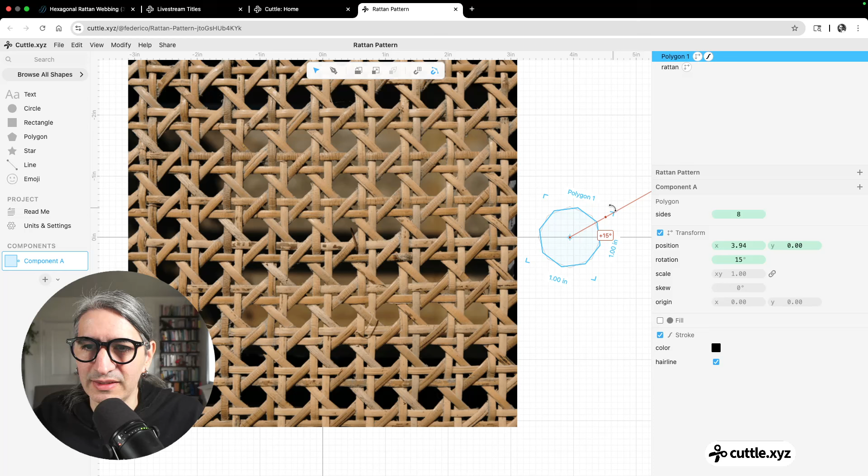And then I started placing my octagon here in the middle. But then I realized that the octagon was the shape of the inside hole, but that shape was actually better understood as the combination of two squares. Let me tell you what I mean. If I grab a square and size it a bit, I could see that there are lines going across - that's one of the squares, horizontally. Then there are lines going vertically, so that's another one of the squares. And then there are lines going diagonally.

They are going at a 45-degree angle. So for example, if I take this same square and rotate it by 45 degrees, that also matches the lines. Oops, let me move that. Maybe I should lock that image so it doesn't mess with me. That wasn't the image. Anyway, so I could make the hairline. Yeah, so there we go.

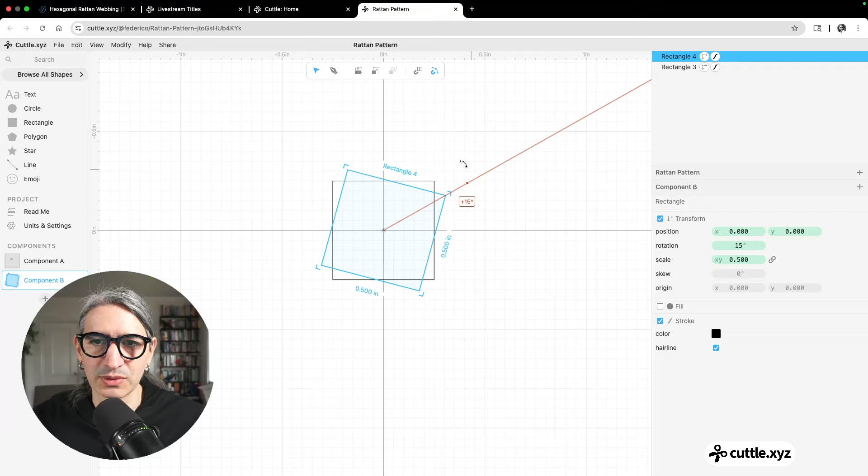So then I was thinking, oh okay, this might be the basis for this pattern - it's just two squares, one of them rotated 45 degrees. So let's test that out. I'm going to create a new component here. I think my end result should be a little smaller than 1 inch, because 1 inch seems really big, so I wanted to start with a square that was half an inch - sounded reasonable to me. So I did a square that's half an inch. Then I can duplicate it, and then I can rotate it 45 degrees. If I hold the shift key, you'll see that it snaps to 15, 30, and then horizontal or 45.

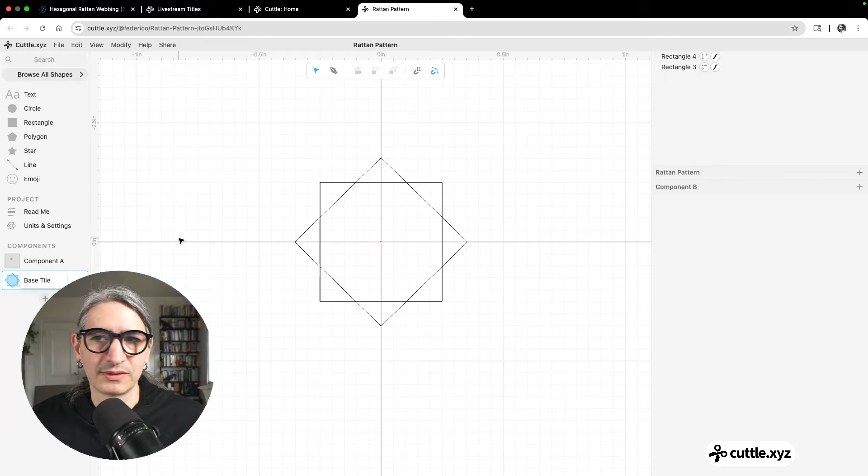So now that I have this base thing, I could use the tile repeat to test it. I'm going to call these... what do we call these? I don't know, the base tile. So in a different component, I'm going to place my base tile, and then I can use that tile repeat. I'm going to go to modify, there's this tile repeat. Now I just need to connect it.

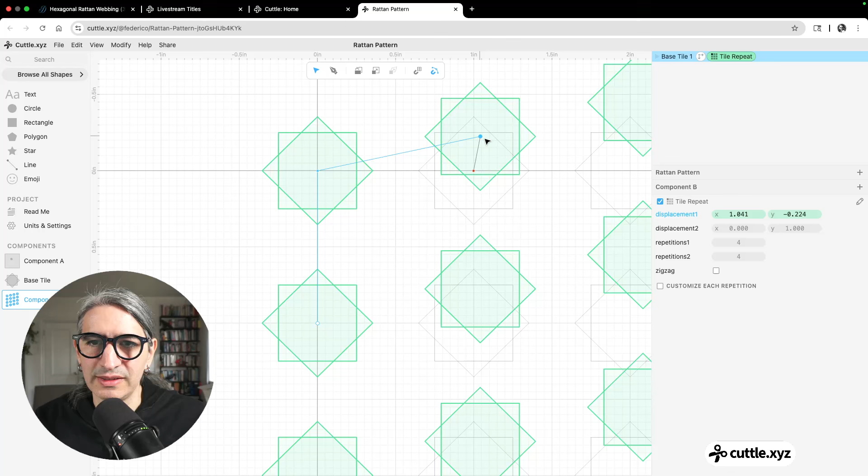When you're using tile repeat, whenever you select the base shape, you'll get these handles, like a blue handle with a displacement. I could change the displacement here and the other displacement. But sometimes you want to match certain points, and as a default, the origin is right at the center of your shape.

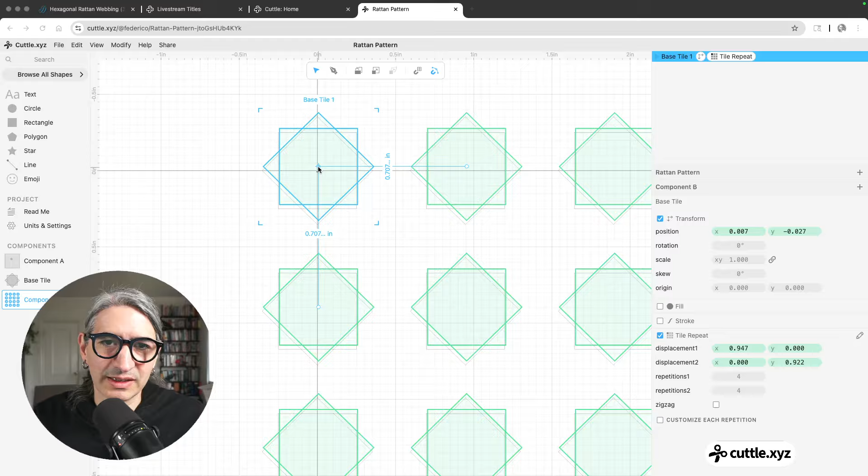If you hold Command, or Control on Windows, twice you get Siri. Let me undo that. If you hold Command, then you can move the transform center.

I want the corners of the rectangles to match, so I can place it first on the top corner, and now I can grab the displacement handle and make it touch. This isn't going to work for the other side, so I can move the origin again, and make this displacement handle snap to the corner.

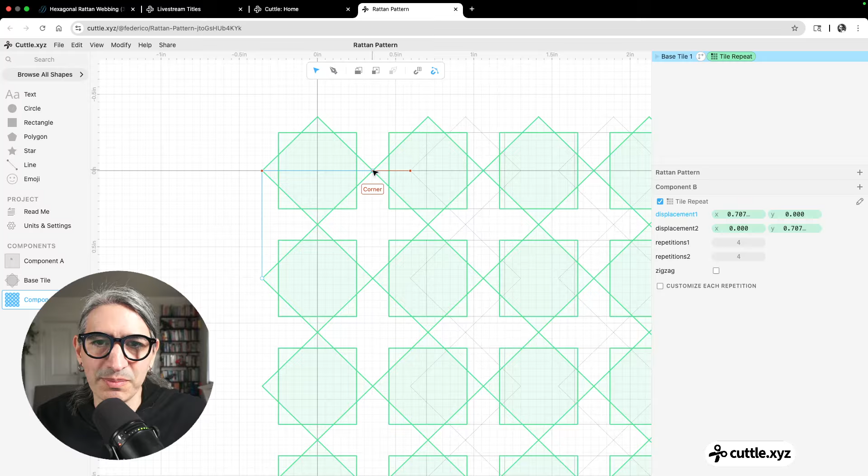Check this out. I think I have part of the pattern here because I get the 45-degree lines going in both directions, and I almost get the horizontal lines. So close, but not quite.

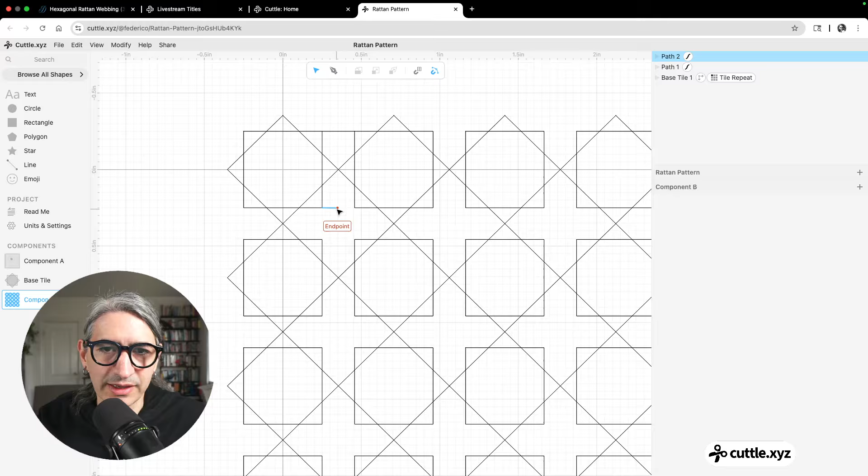I think what I need to do is connect this line to this one. So I need to extend this one halfway, and the other one is going to match it.

What I'm analyzing here is that if I drag a guide, I need this line to extend all the way to the midpoint, and that needs to happen all around.

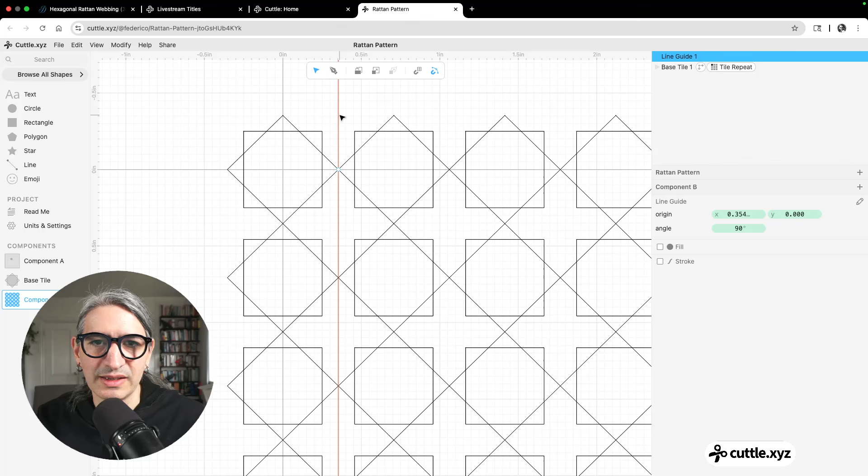So I can make those lines continuous. Let me go back to my base tile, and I'm going to drag a bunch of guides to make that happen. To get guides, you click on the ruler on the top, and then you click and drag.

Here we go. I'm going to use the pen tool. The idea here, oh, maybe I didn't put it where I wanted. The idea is I want to make a line from here to the edge, and then from here to the edge, holding the shift key so that they stay horizontal. Then I need to do that all around.

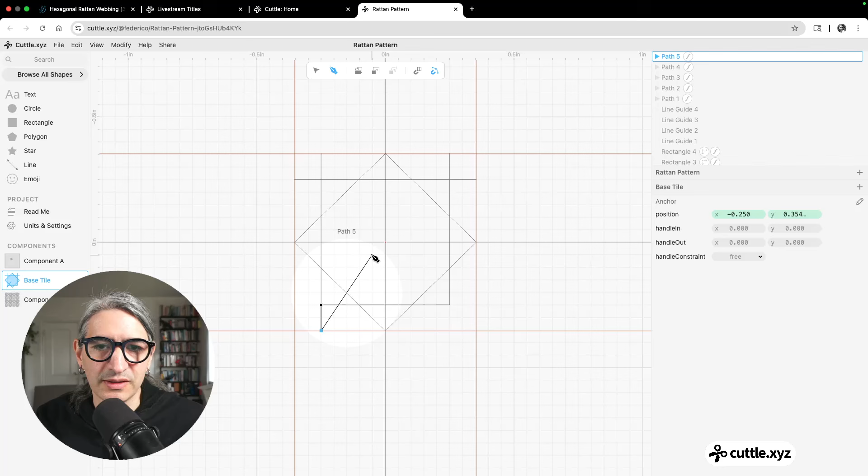But this made me think that there are essentially lines going across. I guess this would work - hold the shift key, then pen tool, holding the shift key, and then every time I'm making a new line, I hit select again, and then I start it.

As you can see, the shortcut for select is V. So whenever I hit pen, I make my line, and then hit V, so it kind of snaps out of it.

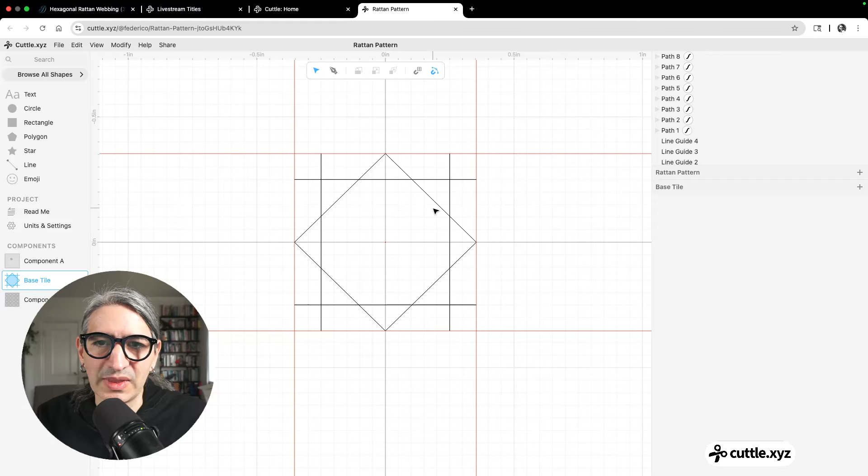I think this gives me that connection point. So now if I move over to my pattern, I think this works. I got the horizontal lines, the vertical lines, and then the 45-degree lines.

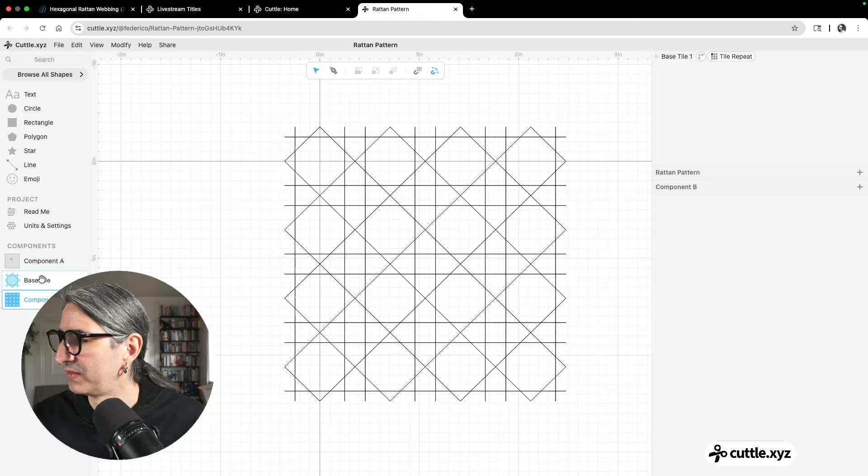Now, how do we go from these to a laser cut thing? I think outline stroke is going to do it for us. Basically, I'm going to go to the base tile, select everything, and there's a modifier called outline stroke.

That essentially gives it some thickness. But if I do the default width, I see that these intermediate holes disappear. So what I want to do is make my outline thick enough that I can still see those holes. Let me move over to my pattern.

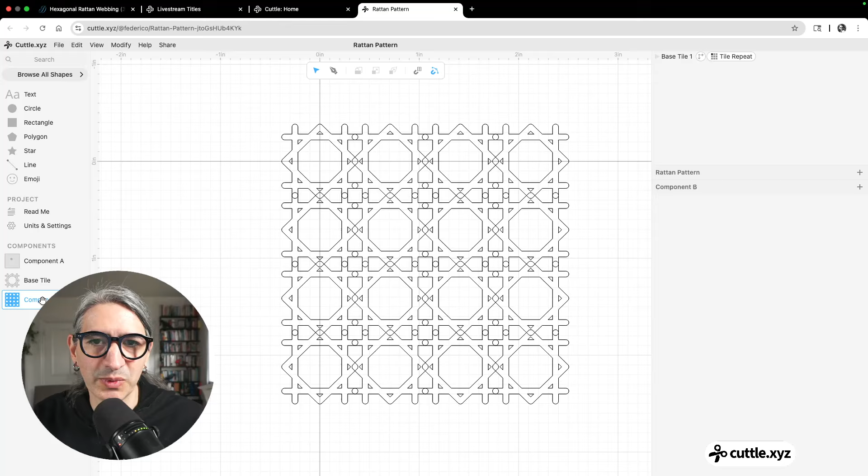My base tile looks like this. And then when I have everything, I get these overlaps, but I can deal with that by selecting and then applying a Boolean union.

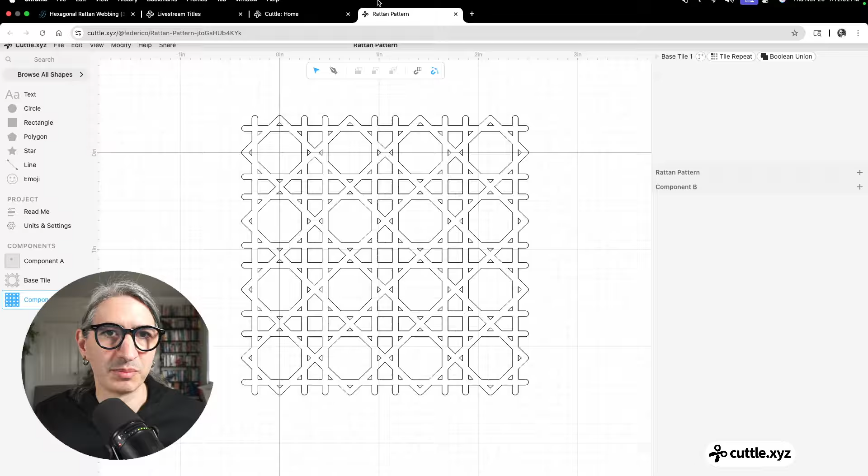So that works. I think that gives me the base pattern. Let me see if we can compare - here I get horizontal lines, vertical lines, and then a square in between.

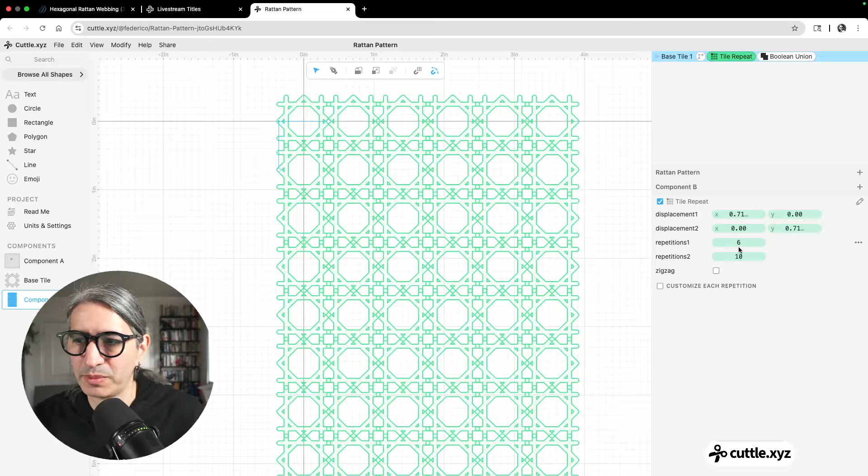Let's cut it, because this is good to go. I can make it as big as I want if I increase the number of repetitions, but I think I did a 4x4. So then you can go to File, download SVG, and then cut it. Check this out.

My masking game wasn't super great, so you can see some scorching, but I think it sells the idea. It cut all together, I think it gives me the pattern that I wanted. It takes a while to cut - actually, it's a surprising amount of holes. I've noticed that.

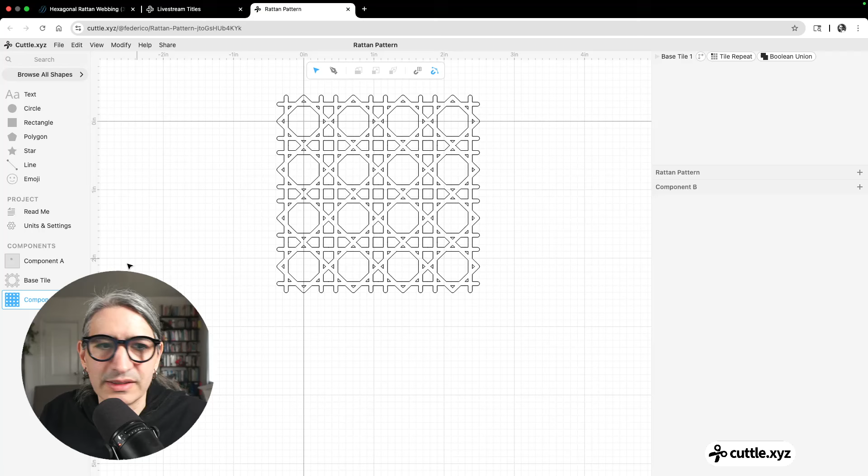I did notice that on some of the ones I saw on Etsy. I'm gonna extract the width parameters, so let me extract this project so we can visualize it better.

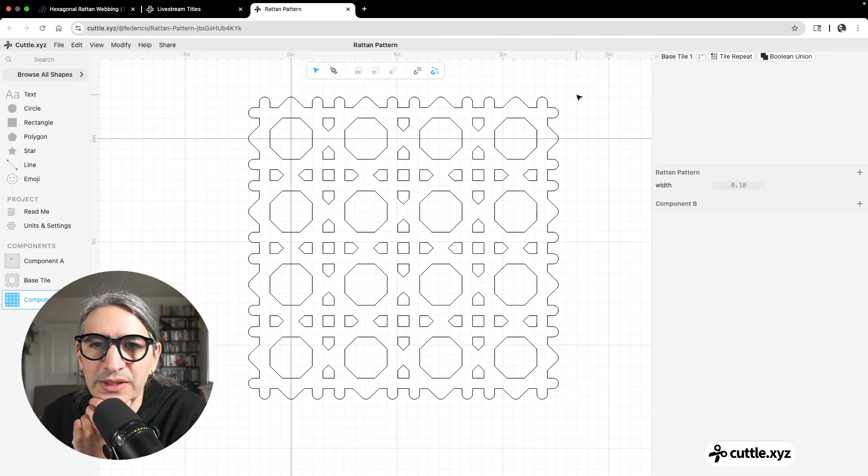I did notice that some of the ones on Etsy, if I increase the width all the way to 0.1 or more, those little holes disappeared, but they still kind of give you an abstracted sense of the pattern, like the smaller holes. And that seems to work. I cut one of these too, and so fewer holes, and you still get the look.

This is the comparison. This is exactly the same, but the width on this one is 0.06 and the width on this one is 0.1. So I don't know, I think it works without having these little additional holes.

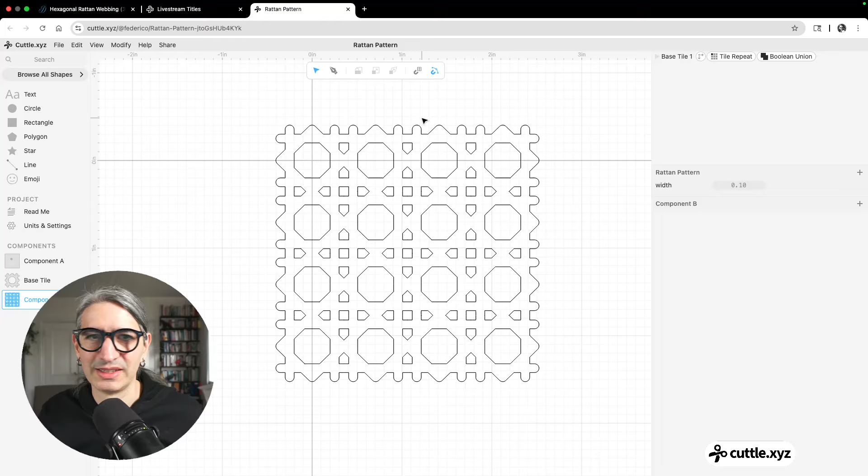So that's good. The next step I wanted to do was, I like the look of having the scores to create the real effect of the weave. So I wanted to figure those out.

I started doing it with this small version with the base tile, the 0.5 inches, and I didn't have enough - it wasn't big enough to do the scores. So I think it works better if I do a slightly different one. I'm gonna create a base tile that is 0.75 inches.

0.75 - these numbers are labels, they're not gonna do anything for me. So I'm gonna construct it in a similar way, maybe redundant, but I'm still gonna show you the construction again. So I start with a rectangle or square, and I'm gonna change the scale to 0.75.

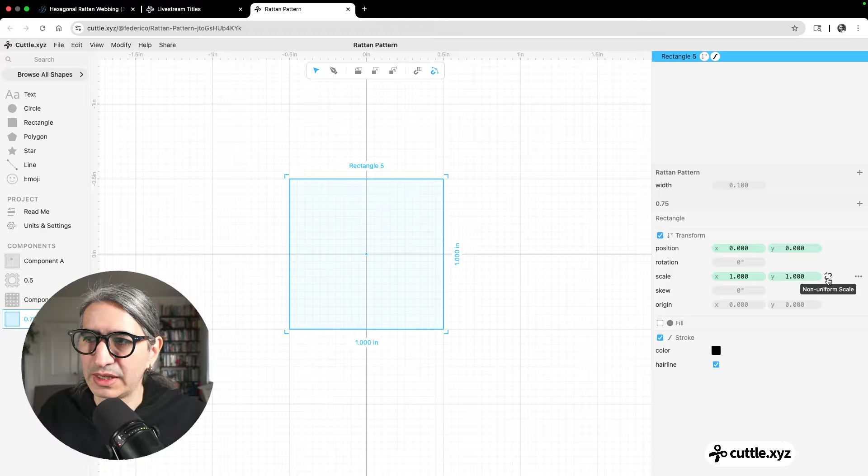So that's my base. Then I'm gonna duplicate it - I can right click on it, duplicate, and then rotate it while holding shift, so it's 45 degrees. And now I'm just gonna do the guides again to extend it, although this is what I noticed actually - check this out.

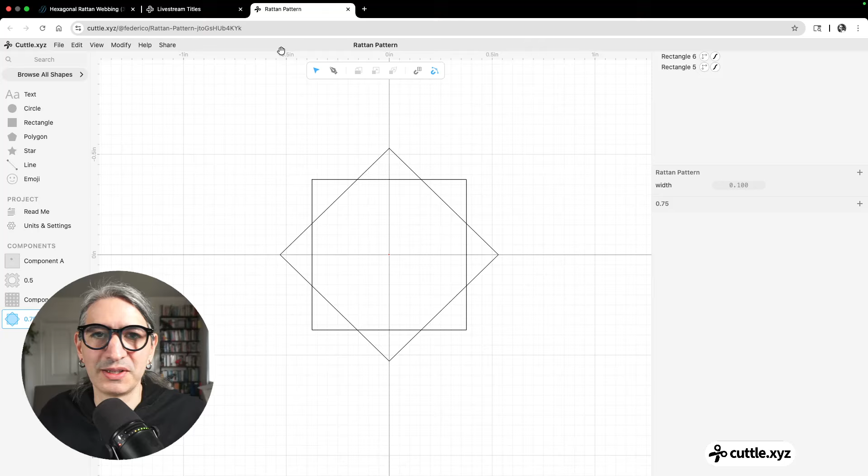I'm gonna put guides everywhere that match that. I'm gonna drag a bunch of guides and show you what I mean.

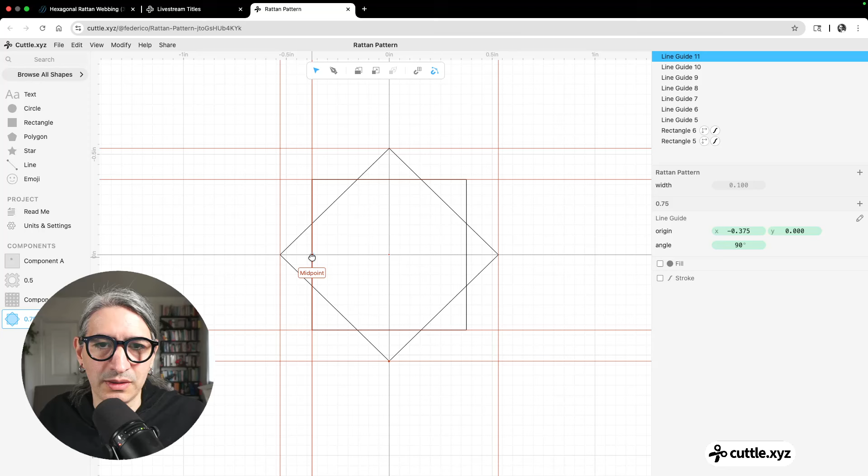So I want one more here. I'm dragging the guides and making them snap to the existing geometry. There we go, a bunch of guides.

New feature, by the way - if you go to View, there's an option that says Show Guides, and by default it's on, so you can turn it off and all your guides are gone, but they still exist right there, you can kind of preview them. So let's bring them back on.

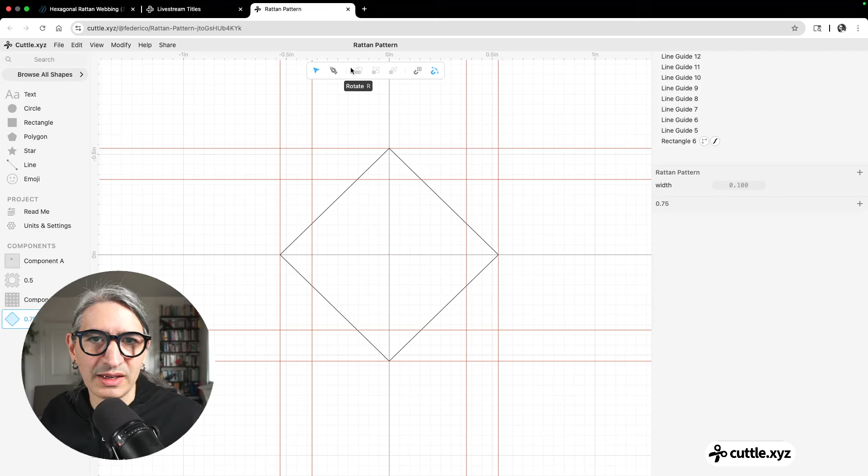So what I noticed is that this could just be a straight line, so I can actually get rid of this rectangle and just draw a straight line right here from here to here. And I could draw the other three lines, but I'm going to be fancy and use the modifier.

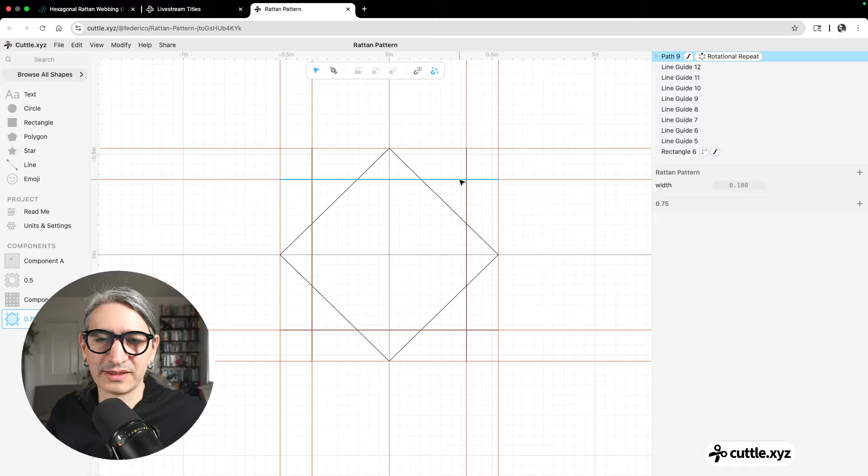I could do the rotational repeat, and I know it's not that many, it's just four, so I'm going to reduce these to four. And that also gives me exactly the thing I wanted. Let me hide the guides.

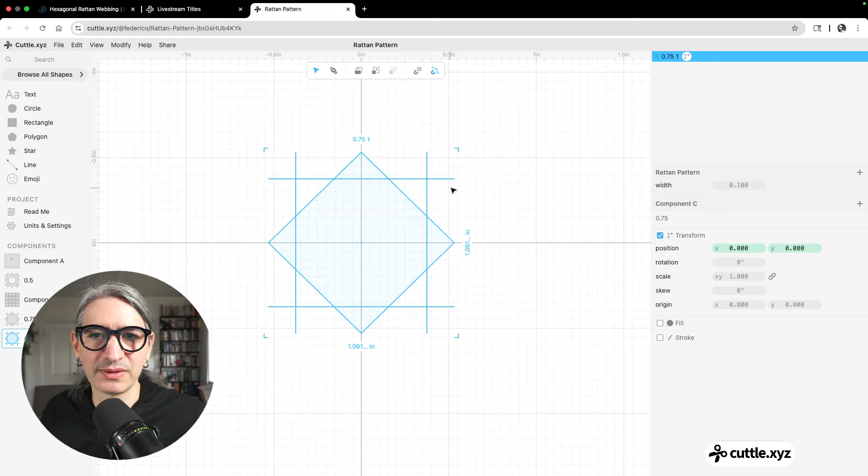So this is exactly the pattern. See, like I told you, it wasn't going to be as complicated - this base tile is simpler than it. So then I'm going to create a new component, and I'm going to use my 0.75. If the base rectangle is 0.75, the base tile ends up being about 1 inch.

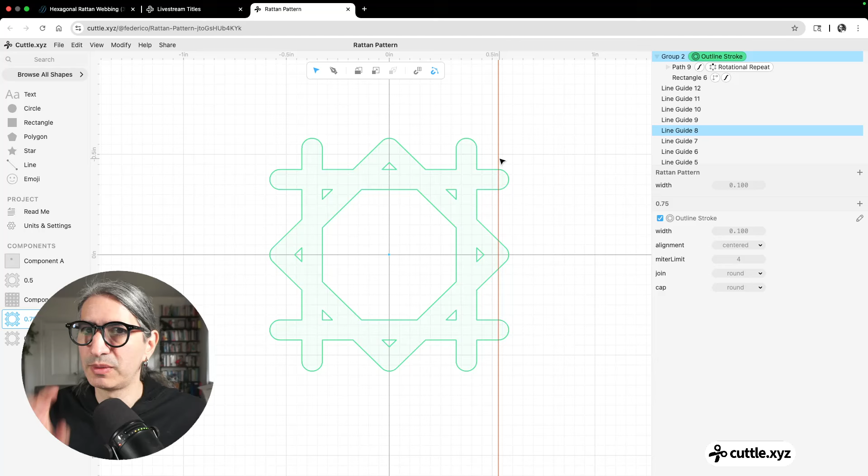When making the tiling, it's nicer to do it without outlining the stroke, because, well, let me show you why. If I outline the stroke right now, outline stroke also applies a union, so you can see that it gives me a single shape.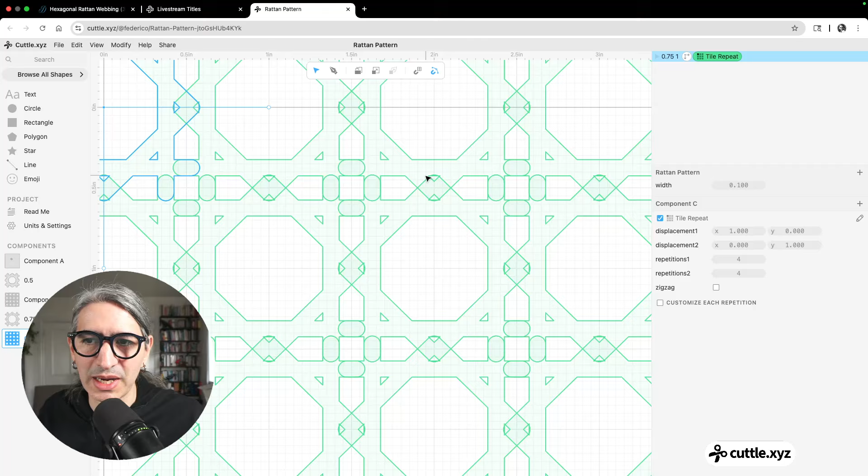And then I try to tile these - I'm going to apply the tile repeat. You'll notice that it's harder to see the point where they match. This is very close because the default tile is 1 inch, but it's not exactly precise because these points aren't matching. So what I mean is it's better to do it this way. I'm going to disable the outline stroke for now, and notice how the corners are not matching.

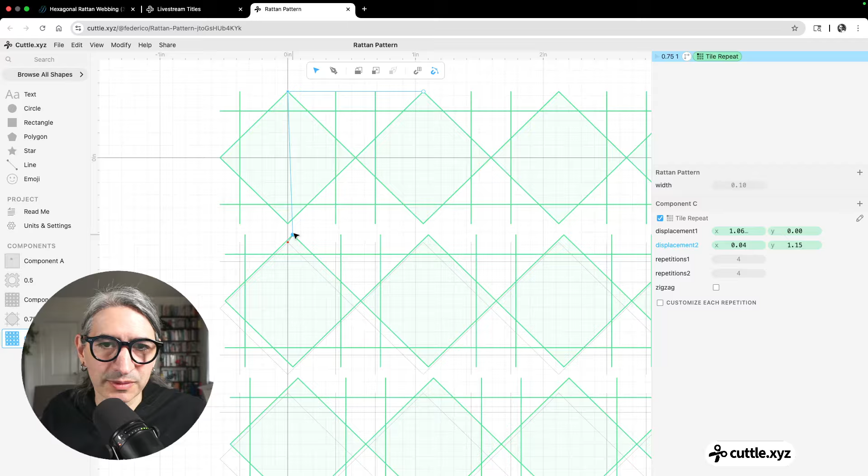We just want those corners to match. So I'm going to select the tile repeat, move the origin point, make it bigger, and move the transform center. I'm going to move it to the left corner first so I can snap it perfectly to the corners of those rectangles. Then I'll hold command, move it to a corner, and snap it to the corners of these. So that gets me that pattern again.

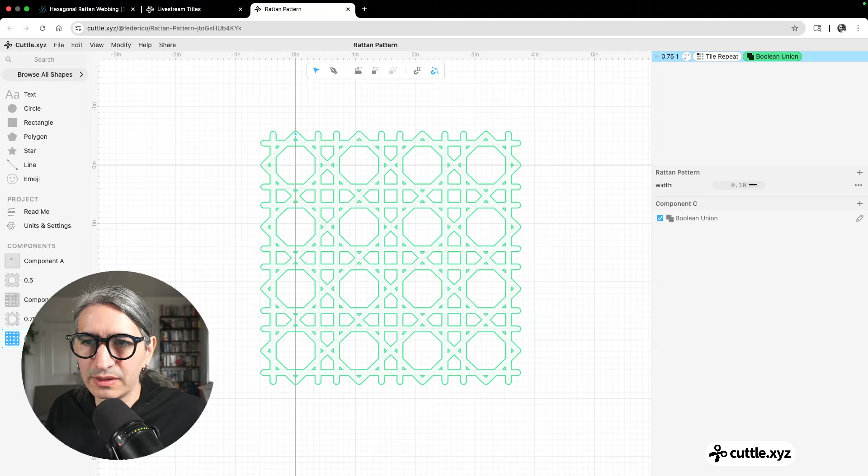Now I can enable the outline stroke, and I can Boolean union these. I'm going to go with the default 0.1 width. Now the scores - let's make this red.

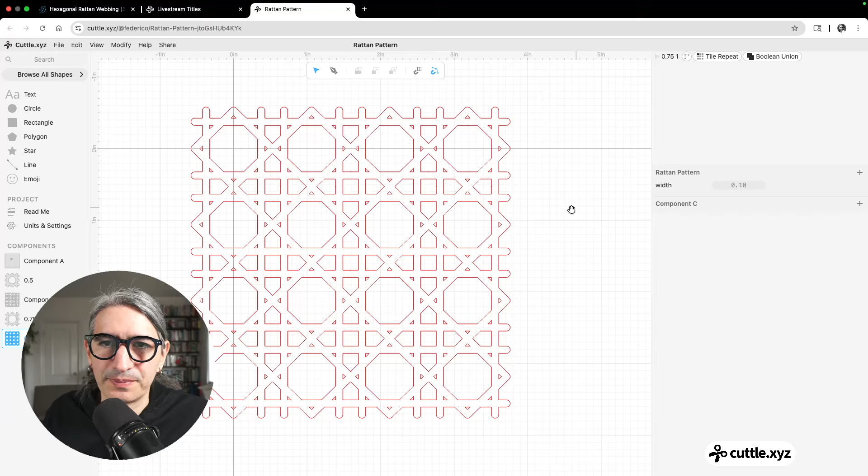I think it's more visible on screen and also easier to cut. So here we go. The idea with the weave is that you get this over, under, over, under pattern. Initially I started doing it by hand so I could understand what was going on.

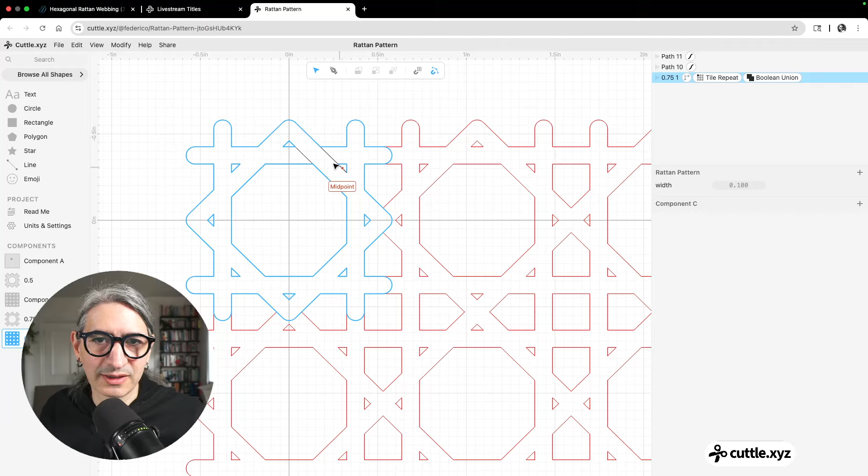So I'm going to use the pen tool and snap it. Let's say I start over here, so I need to do 2, so 1 and 2 lines. So that gives me the over, and then this one should be under.

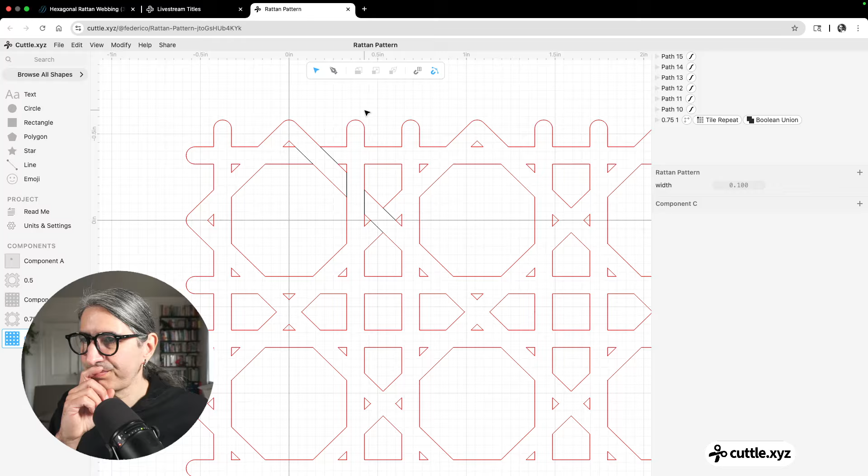So you see, you get the over, and then this one should be over, and this one should be under, and so on and so forth. But it would be really tedious to do them all like this.

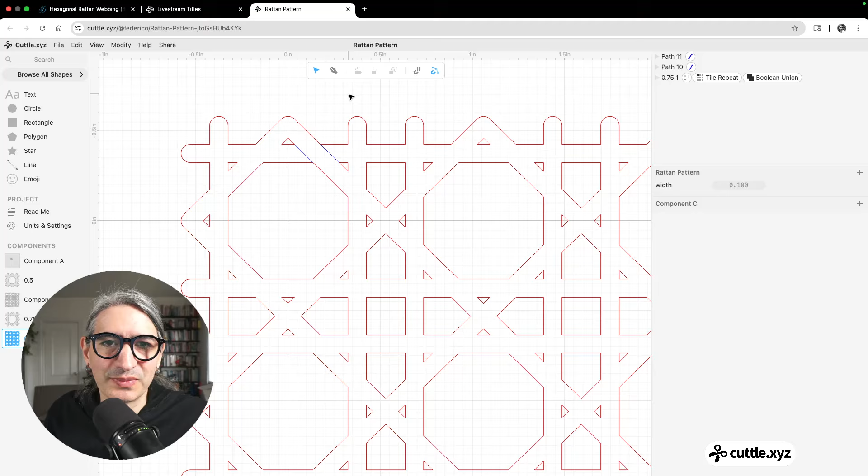So what I did notice is that there is a pattern here. I mean, yeah, I'm making a pattern, but the over-under of this rectangle repeats around. So if I were to - I'm gonna make it blue so it's more visible - I could actually do a rotational repeat here.

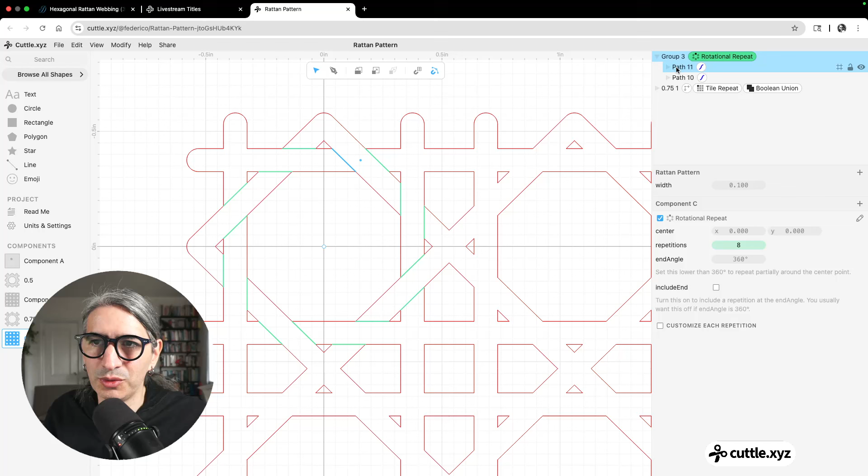So if I select these 2 and create a rotational repeat - this is an octagon, so it has 8 sides, so I need to do 8 - notice how the 8 sides just match really nicely to give me the over, under of this rectangle. And that means I only drew 2 paths. I think the same thing applies for these - that repeat gives me all the lines that go diagonally.

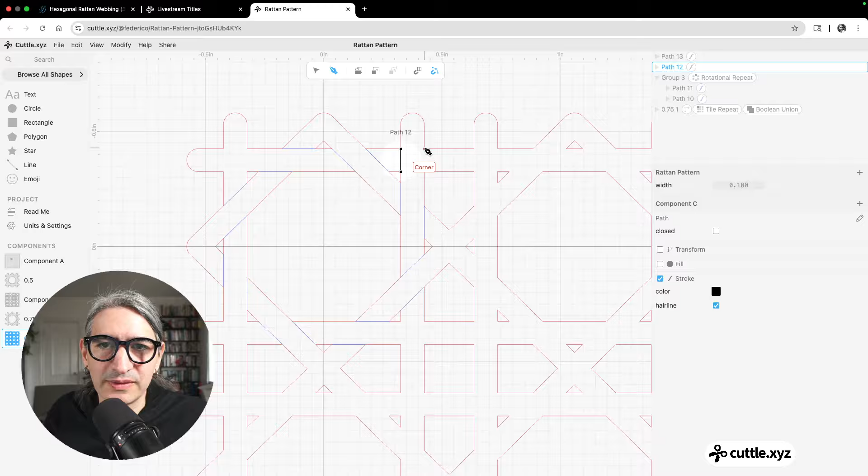And then to get the lines that go vertically, I can do another 2. So I can do this one, just making it snap to the corners.

If I do a rotational repeat on this one, let's make it blue, I can get the same effect. Actually, I just need to move it down to this rotational repeat, so it belongs to the same group. That gives me all the horizontal ones.

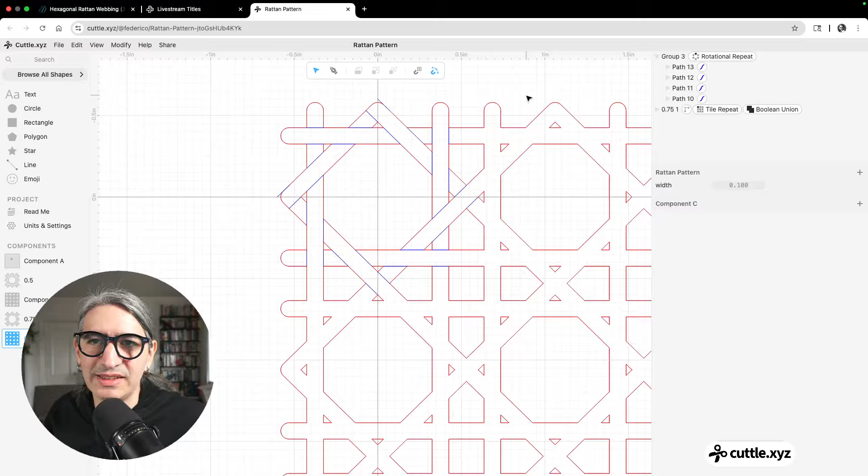So it works, I think. To make life a little less complicated, I could separate this group, the score group, onto a different component, so let me do that. Maybe I could replicate that component, but I can right click on this, and there's an option that says extract as component. That just took the group with the scores and extracted it as a component.

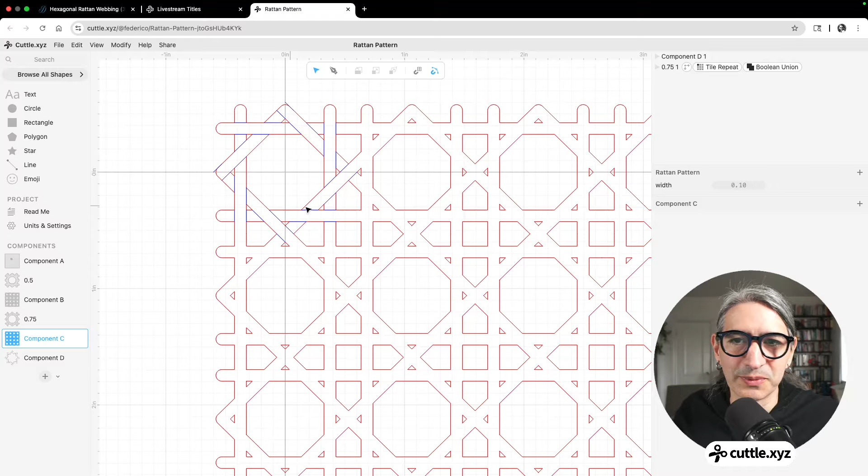Maybe this is a little easier to see. You can see that this is the thing that repeats these 4 lines - that repeats 8 times, like these 8. And that's what gives us all the scores. I think it's very economical. So then what I need to do is match the same pattern for the scores.

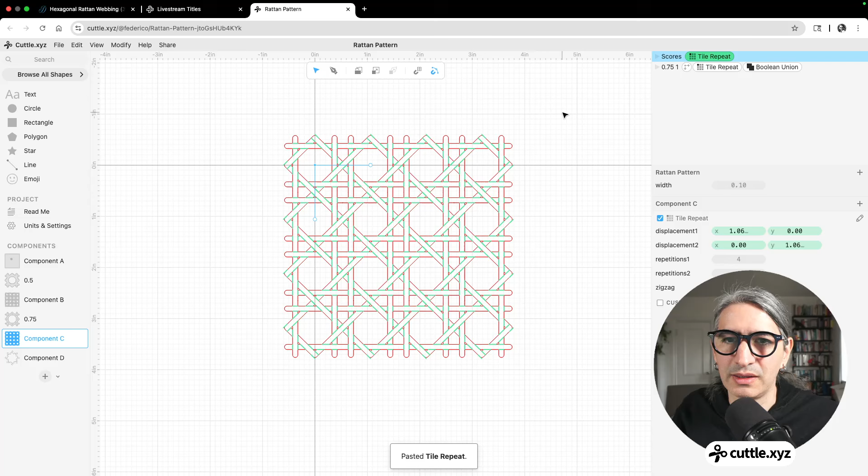So I can take this tile repeat, and I don't need to do all the messing around with the spacing and stuff, because I can simply copy these. So I could do Command C, and go to the scores. I could call this the scores actually - Scores - and then go paste. And that will paste exactly the same thing on top.

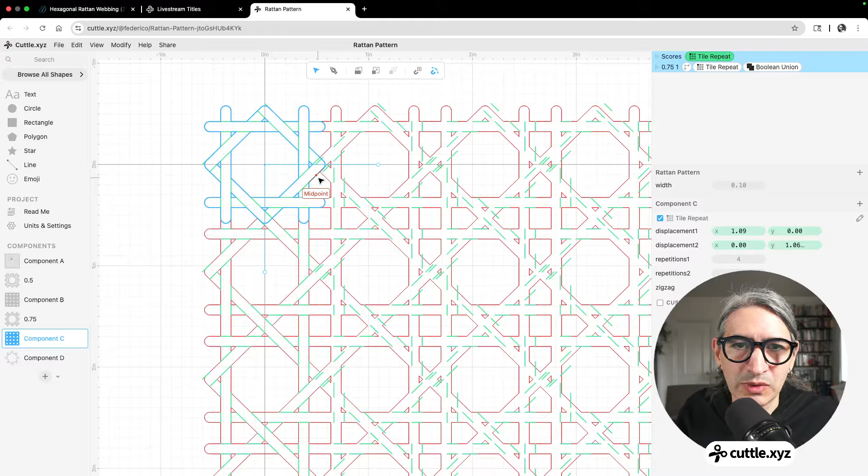One thing to watch out for when doing this operation is that there are actually going to be some overlaps, some duplicated lines. Let me show you what I mean. I'm just going to slightly change the displacement here. So look at this - let me hide the main pattern. Notice how these 2 lines right here are repeated, so they're kind of overlapping each other. So if you were to score that, you would get a double score.

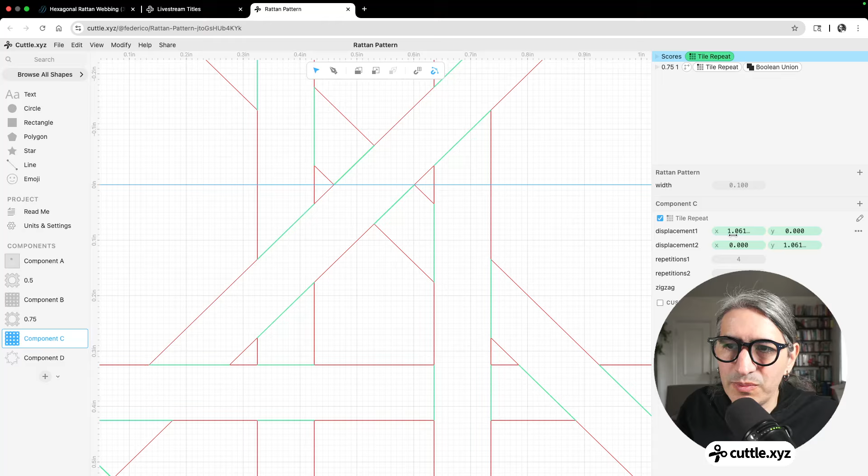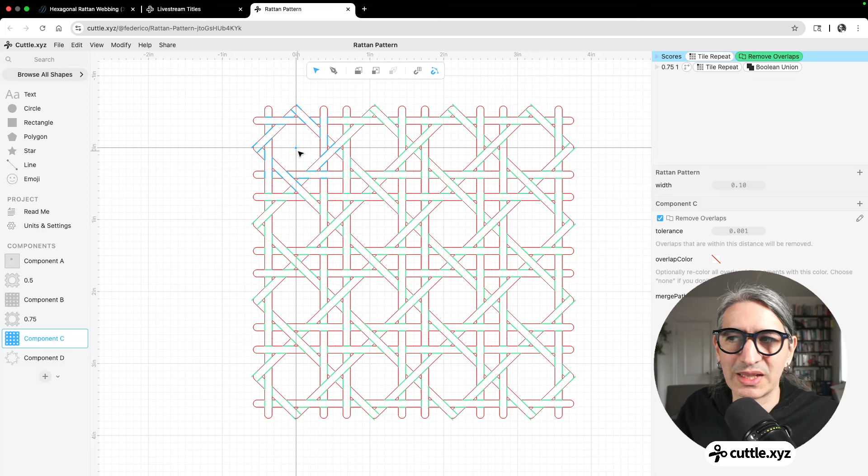Let me undo that. It's hard to see, but by moving it aside a little bit like that, you see how these two are repeated, all the crossing ones. So what I need to do is remove the lines that overlap. Only on the scores, I can apply this modifier called remove overlaps all the way down here. And it looks like nothing happened, but those two lines that were overlapping disappeared.

So now I send this to the laser cutter, and this one also takes a little bit because I did the scores kind of slow, so they would like... But I think the effect is kind of cool. Check this out. All the red lines cut, so this cuts as a single piece, but then the score lines give you that kind of woven effect, which I think is really effective.

I think this could be a coaster or something like that, but I'm kind of really into the look of this faux woven pattern. So compare that to, where's my other one? Yeah, to these. So this is cool, it works. It gives you the look that you want with less work, but this one is also cool, I think, and it gives you this kind of fancy effect.

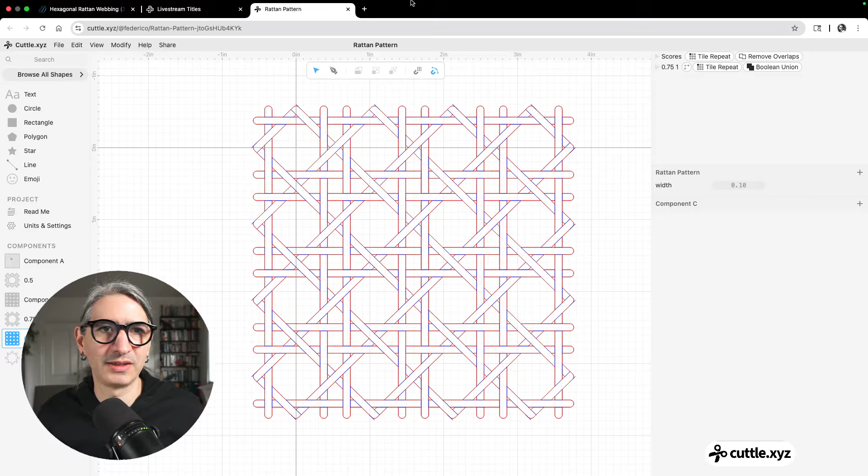So that's the construction of the pattern. But looking at Etsy, I saw that people used it in different projects. So I think it's worthwhile discussing a little bit how to use it. Let me see, I saw a couple of ornaments. So let me create a new component, and then we can sketch out a quick ornament.

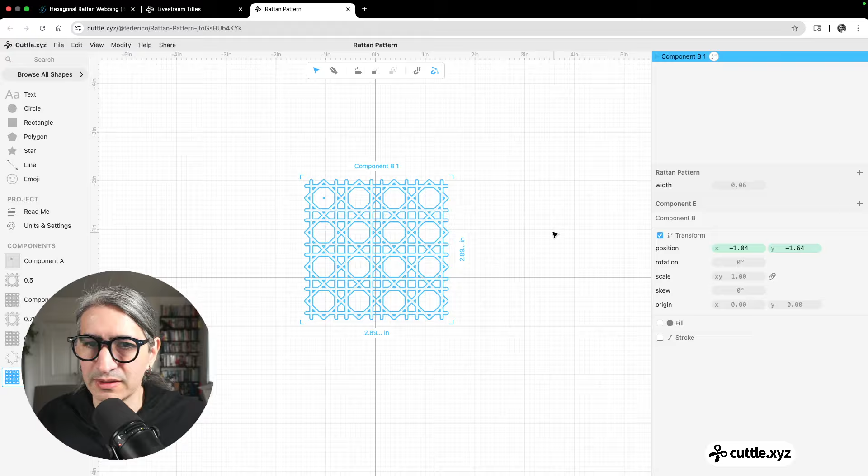I'm going to grab the one without scores first, with the 06. Why isn't it red? I want it to be red. So I'm going to center it by hand, meaning I'm going to grab it from the midpoint of this center place and drag it all the way to the center. Then I'm going to select the midpoint here and hold the shift key so it only moves horizontally. So, manually centered.

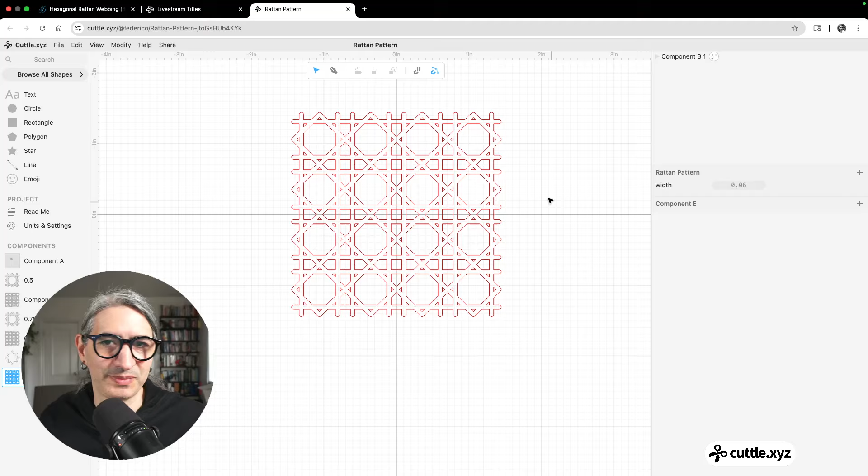So now I want like a circle. I want a circle to be about, let's see, how big of a circle can I fit here? So I can do like 2.5 inches, more or less. It looks good.

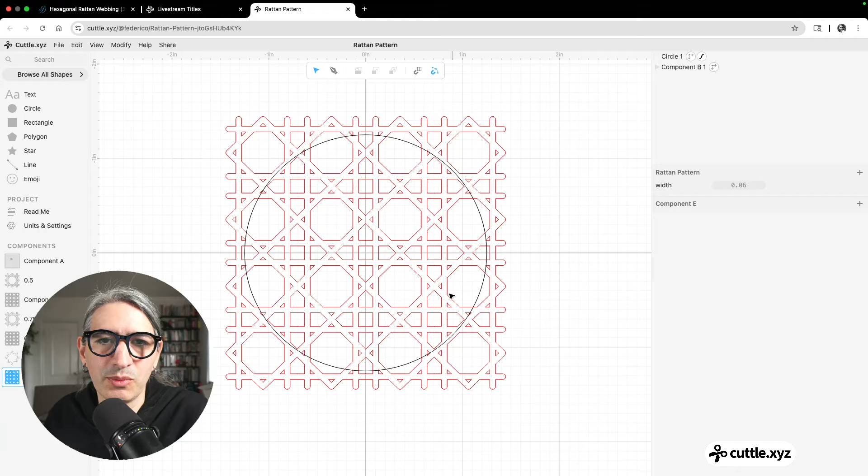So I'm going to use the mask to cut whatever is inside of the circle. I'm going to do modify, mask. One slight downside of what I just did is that, oh hold on.

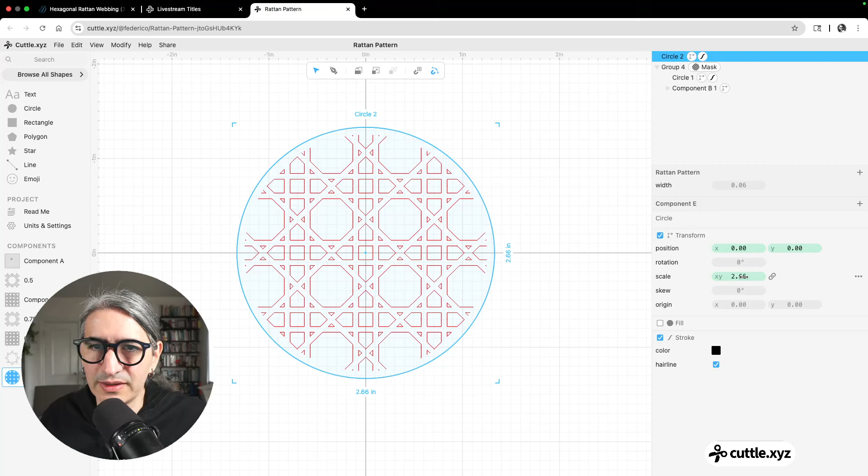So now I want an outline. I'm going to grab another circle and make it something like this, a little bigger. So what I was saying is that one slight downside of what I just did with the mask is that

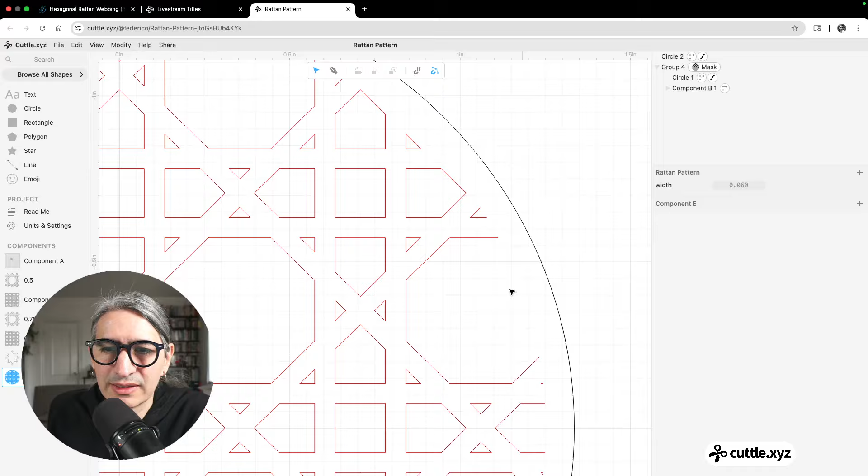whatever you mask is not going to match the pattern perfectly, and so you're going to end up with these uncut half pieces. Like see this triangle here? That triangle is not complete, so it's not going to be a perfect hole going through it. And same with this bigger octagon, because the octagon got kind of cut off, it's just going to cut this line and it's not going to punch through.

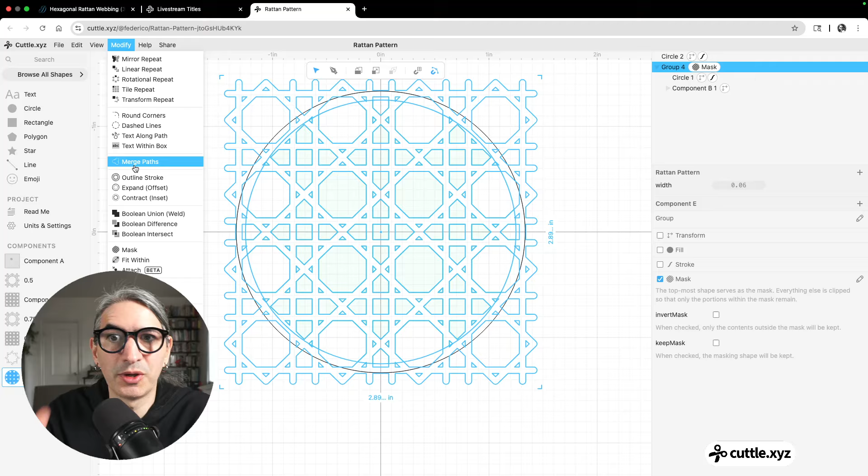So the fix for that in this case is we can apply another modifier to that mask group called merge paths. This merge paths has a funky name, but it only works on open paths, meaning this is an open path because it doesn't close the circle, it's not complete. So when I apply modify, merge paths, you can see the results here. It's showing me what paths it connected. Merge paths uses a connect distance, meaning if it finds something within that distance, it's going to try and connect it.

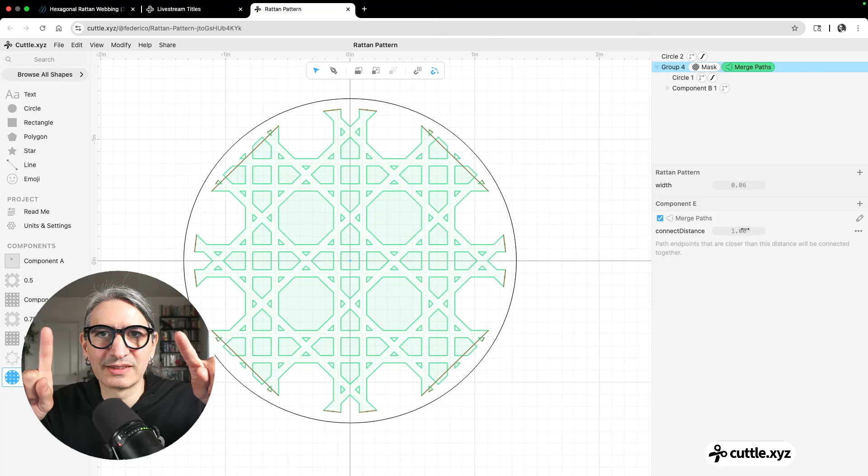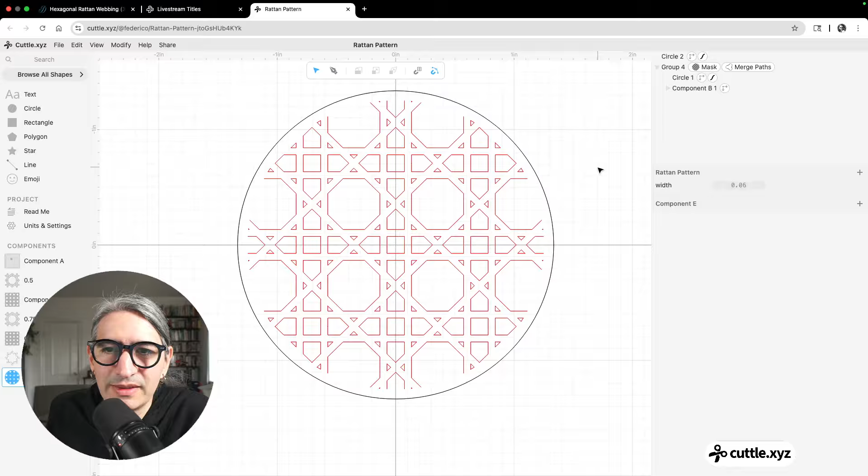So you can see that it connected too many things. We don't want it to connect from here to here, that's too much. So what we can do is reduce the connect distance until it matches what we want. So maybe, maybe I need to make this a little smaller. Let me see.

Pretty, but it's not working the way I want it, because I wanted to connect these two pieces. So maybe I want to make this mask circle a little bigger, and then mess with the connect distance.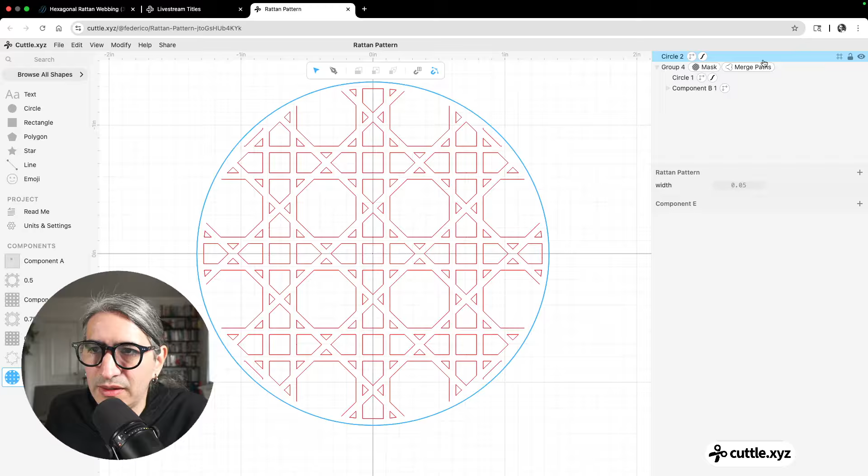There we go. I don't like this one in particular, so I'm going to change the size of the circle a little, so it just covers that section. Okay, this requires a little bit of tweaking. Okay, I think that's more or less the look I'm looking for.

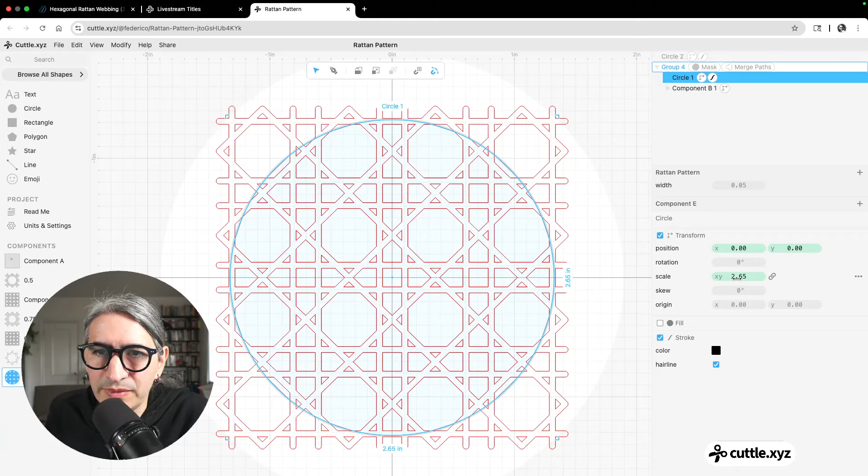And then I'm just gonna adjust the outside circle, so it's a little bigger. Okay, so yeah, this is what I wanted. I wanted those holes to be completed, and then for the outside circle, I'm just gonna add a hole.

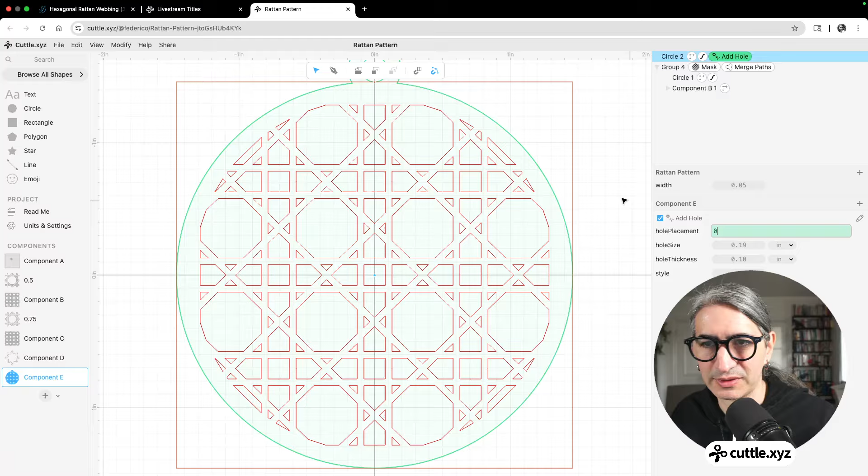With the usual add hole modifier over here. It's just a quick hole. So now I can send this to the laser cutter, and then this is roughly the result.

But yeah, masking takes a little bit of effort, but like here, you can see how those octagons were completed on the edges. So that's a good one.

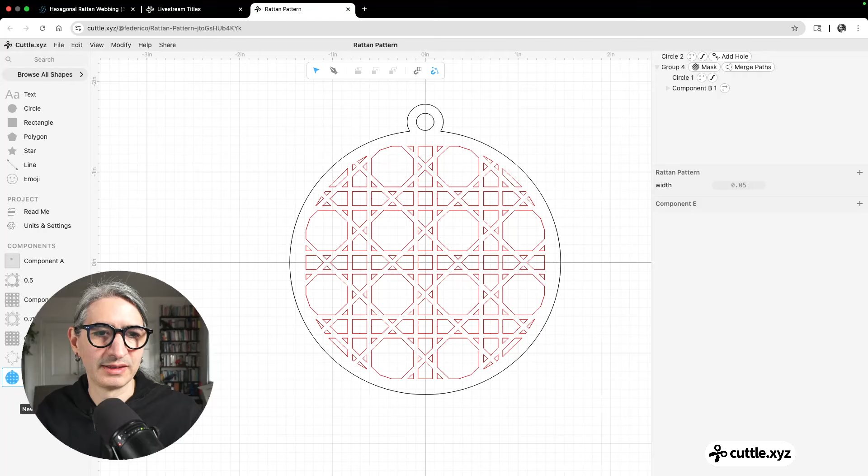It's a little more elaborate to try and do it with the scores, because the merge paths kind of gets on the way a tiny bit. So I was trying, let me show you what I mean.

So if I bring the one that has scores, center it real quick, and I try to apply a mask on it, let me show you what happens. So the mask works because it gives me the thing I want.

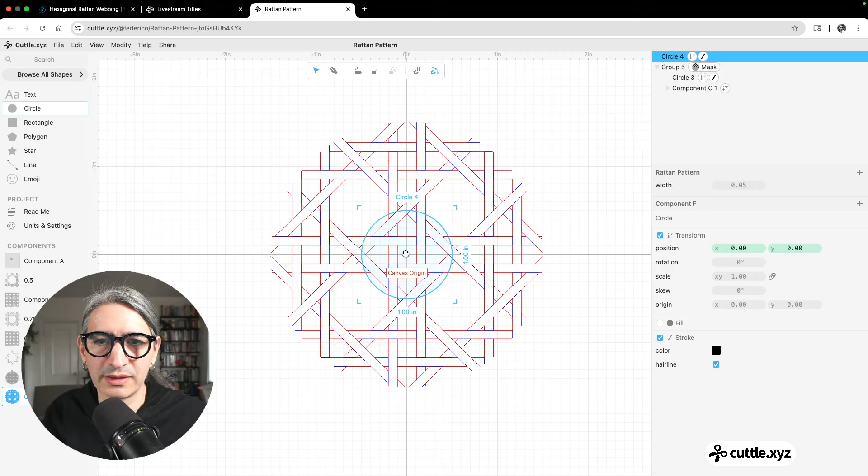But then if I were to cut it, if I were to add the cut, I suffer from the same kind of problem where some holes are not complete.

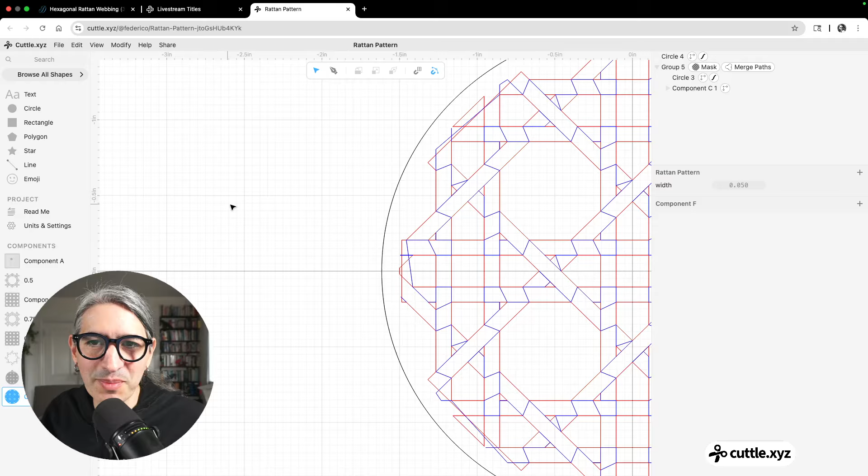But if I were to apply the merge paths in this case, you'll see that it's going to try and complete a bunch of stuff, including the blue. I mean, it's a funky pattern. It's kind of interesting in some ways, but it's not the one that we're looking for.

The kind of workaround I started. So yeah, this one needs work. The workaround I kind of figured was, let me undo all these, is that if you want the scores for now, it works really well if you mask a rectangle.

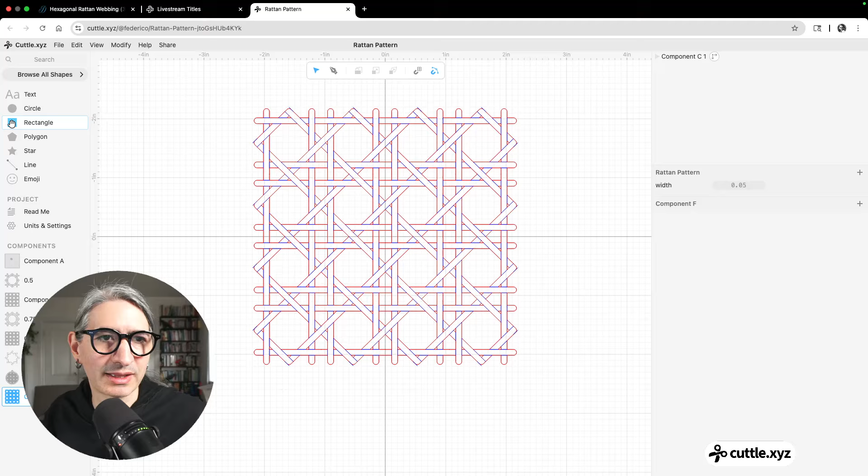So if you do a rectangle, and then match the rectangle to the pattern like these, meaning like it falls within those edges, let's do the mask again.

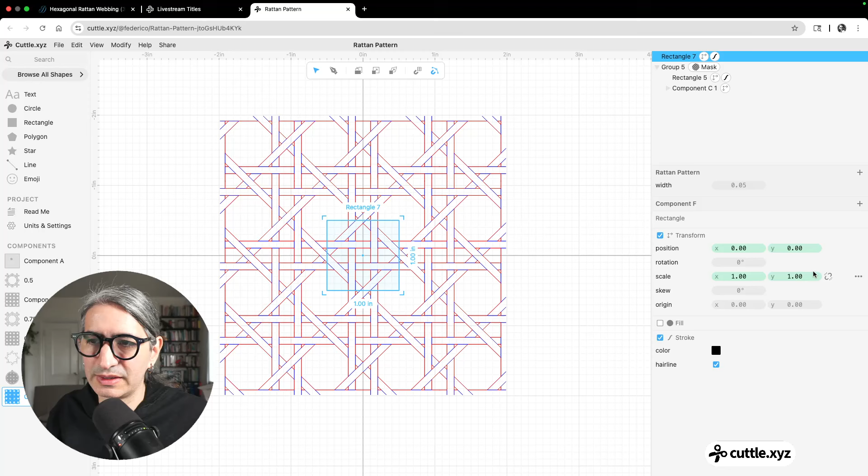Then you can play around with cutting it this way. Past time, but I wanted to show you this last one. So I can do this for the outside.

And then I noticed that some people on Etsy were adding a little frame, which is kind of consistent with the look. So I could duplicate this rectangle. This could be a component, but I'm gonna do it a little faster.

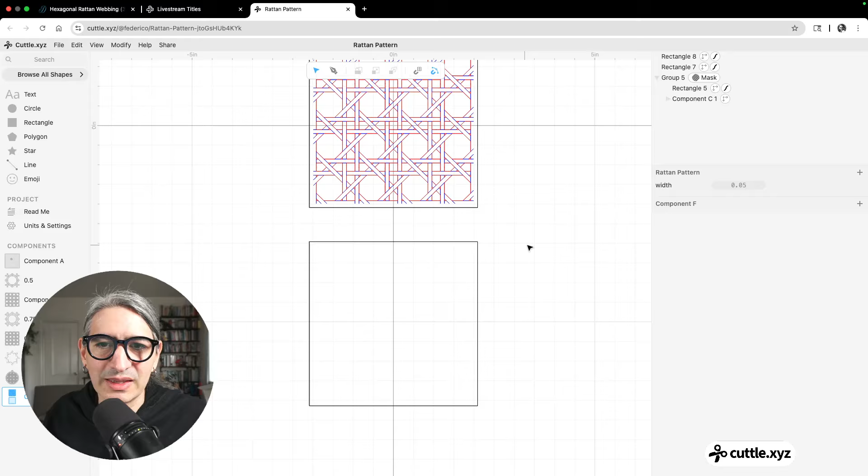So this way I can cut the base, and then so I can cut this base. So I still get those scores, and then the corners are a little odd.

So I think it makes sense to add that frame to mask it. And that kind of gives it a more finished look, or it gives the impression that the strands are going into some place. So I think that's the trick.

All right, cool. So that's it for this pattern. A little elaborate in some ways, but hopefully you can use it on your projects.

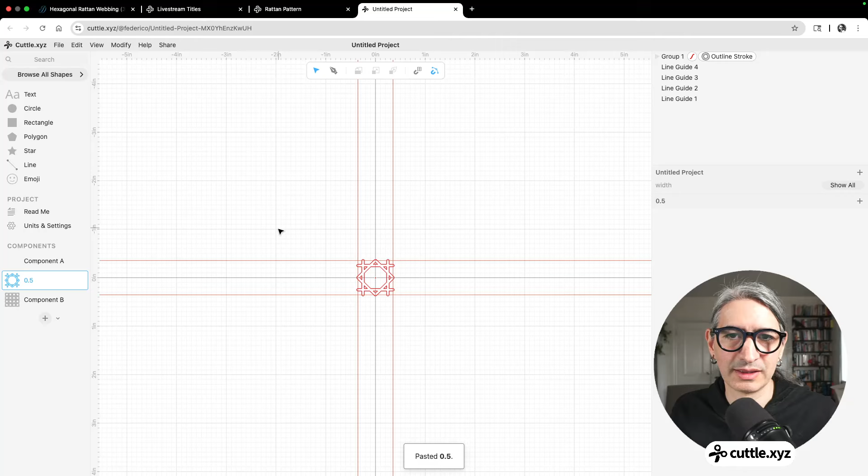And then I did Command V, and then it comes in with all of these. You don't have to do all the work I just did to make it work. You can just simply increase the number of repetitions, so you're good to go with your new project.

So I'll provide that. I think we could do a little more work on making the patterns easier to use, but I think this is a good start.